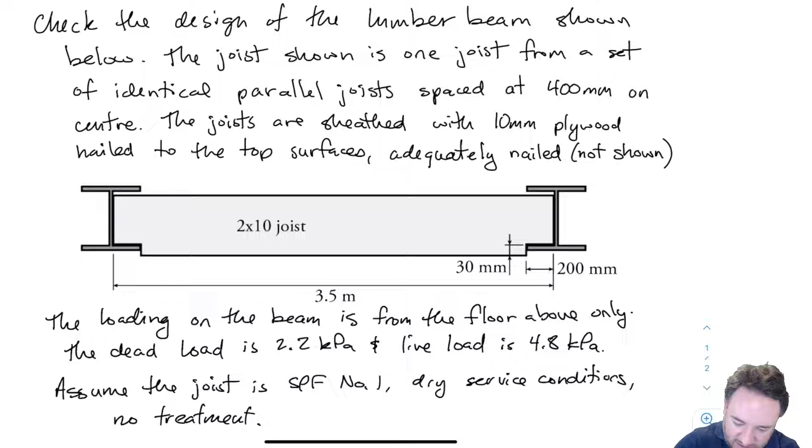So we are going to go ahead and calculate everything. Let's take stock of a few important parameters that we will use throughout. Our beam spacing, as mentioned before, is going to be 400 millimeters.

The span I am going to consider for this is from the center of the bearing over here to the center of the bearing over here. So that's going to be 3.5 minus 100 on either end, so it's 3,500 millimeters minus 200 millimeters. So the span that I'm going to use is 3.3 meters, and that's our L.

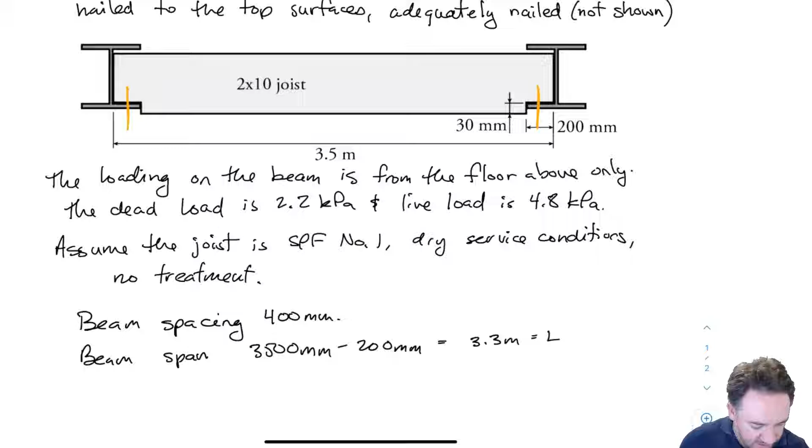We are told that it's dry service conditions, so all our K factors, KSB, KSV, KSF (the one for fracture/shear), KSCP (our compression perpendicular for bearing), KSE (for modulus), are all going to equal 1.0 because we have dry conditions. And there's no treatment, so KT is going to equal 1.0 as well.

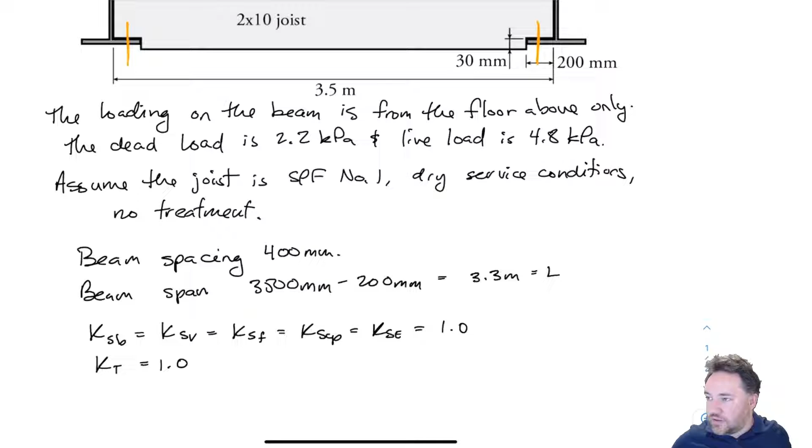Now, what about our system effect factor? You may recall that we have system effect factor conditions, so let's go to the system effect factor table. Here's our system factor table. We have bending, shear, compression parallel to grain. We don't have that in this question, so we don't have to worry about it. And bearing does not have any system effect factor.

So for bending and shear, if I go to the system factor section in the standard, 6.4.4.2 or 6.4.4.1, we can see: does it satisfy case 1? Three or more essentially parallel members spaced not more than 610 apart. Check, they're 400 apart, arranged so that they mutually support the applied load. So case 1 is okay, but maybe we can apply case 2. Let's take a look.

Case 2: the joists, rafters, or studs are sheathed with plywood, wafer board, or OSB, minimum of 9.5 millimeters thickness. That's good, we have 10 millimeter plywood in the question, so that's a check. The second criteria is that sheathing or subfloor is attached to the members to provide minimum stiffness equivalent to that provided by 2-inch common nails at 150 millimeter centers at edges of the sheathing panels. In the question I've said it's adequately nailed, and that's the term used for system factor. So both criteria for case 2 are met.

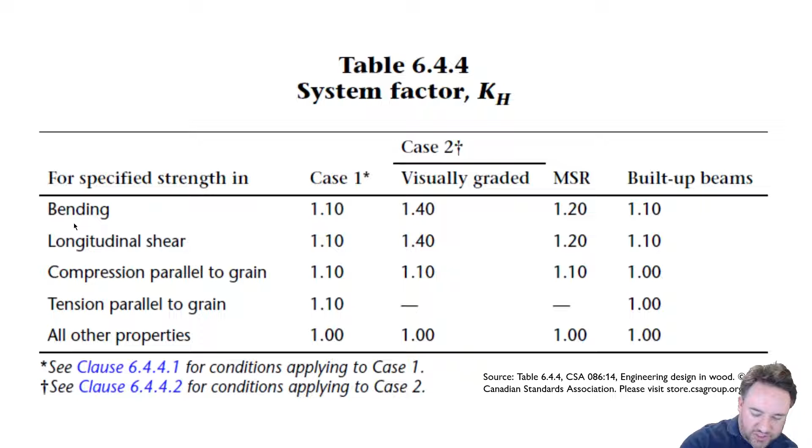So we're going to be able to use the case 2 system factor of 1.4 for our bending and shear calculations. So for KH, for bending and shear, KH is going to equal 1.4. That's great.

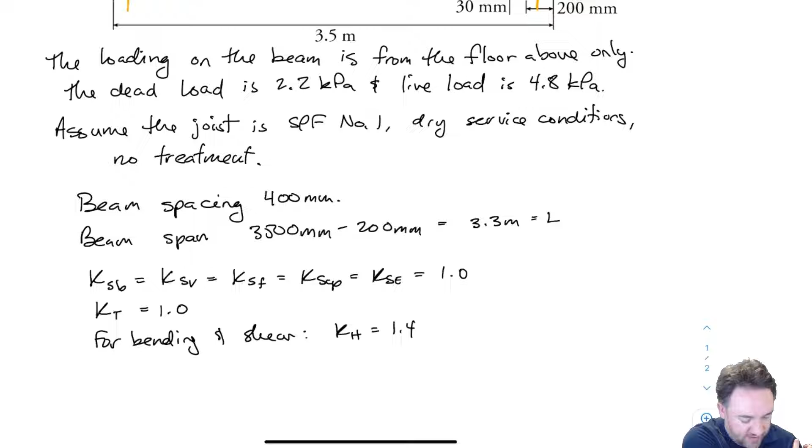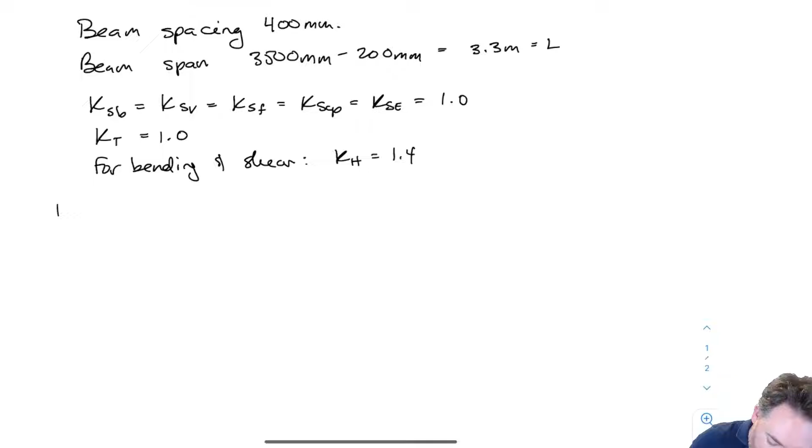Okay, so now let's look at the loading conditions. Actually, why don't we do the beam properties first. We already have some properties here, so let's find all the material properties and list them out.

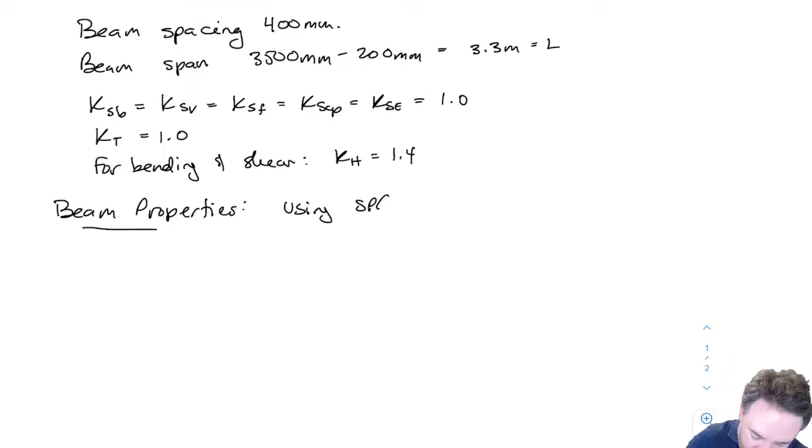We are using SPF #1, and it's a 2x10. If I'm talking about a 2x10, I'm talking about a 38x235. So that's my size, let's put that in. I have B equals 38 millimeters, D equals 235 millimeters, that's my base and height of the cross section. My area gross is going to equal 38 times 235, which is 8930 millimeters squared.

And then what is my S? For bending, we need our section modulus. Since I have this table up already, I can see for a 2x10, my section modulus is 351 times 10 to the 3.

Millimeters cubed. Okay, so then let's find our strengths.

First I have to find my grade category. This is going to be a structural joist and plank category because it's 38 by 235, so it's fallen structural joist and planks, which is table 6.3.1A. We're talking about SPF #1. So my FB is 11.8, my FV for longitudinal shear is 1.5. FC we don't care about because we don't have compression, but FCP, perpendicular to grain compression, we do care about because of bearing, so that's 5.3. And we don't care about tension, but we will care about our E for deflection, and that's it.

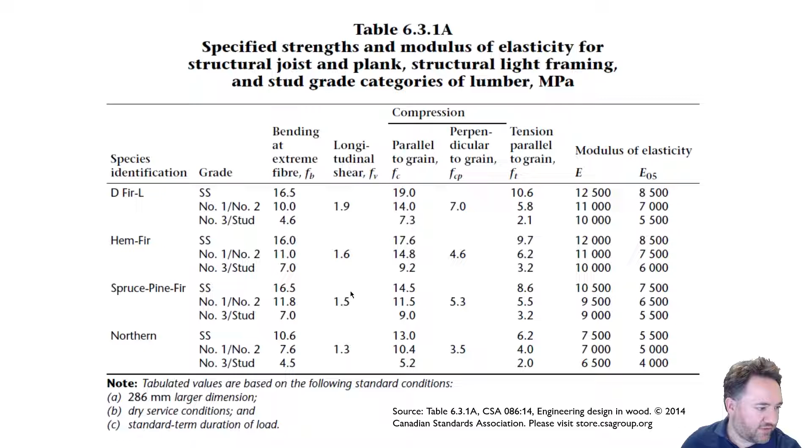So we need E for deflection, FCP for bearing, FV for shear, and FB for bending. Let's put those in here so we have a record. FB equals 11.8 MPa, FV is 1.5 MPa, FCP is 5.3 MPa, and our Young's modulus, which is our mean Young's modulus because we're looking at serviceability for deflection, is 9,500 MPa.

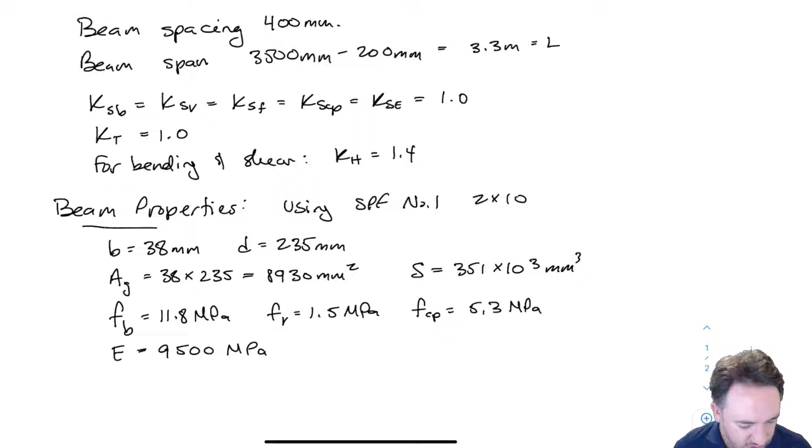Okay, then what about our net area? So our notch depth, say notch DN is going to be right here. It's given as 30 millimeters. That's the depth of our notch.

And our E calculation is going to depend on whether we use the total bearing length or just the minimum bearing length, like the required bearing length. We're going to cover that in a little bit, so I'm going to leave E out for now. But our DN is 30 millimeters.

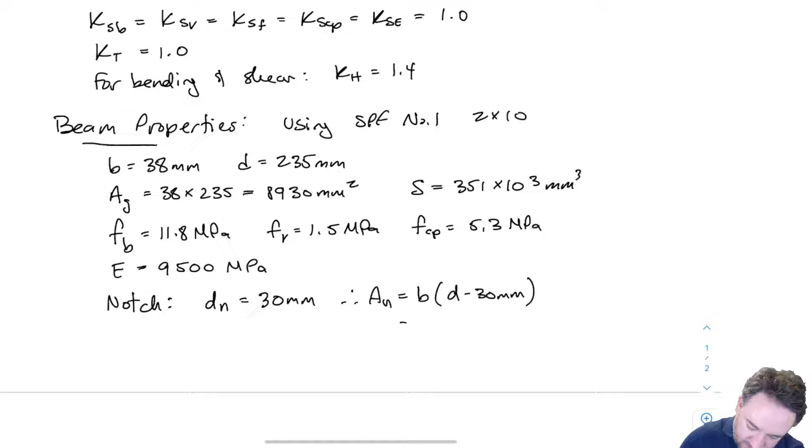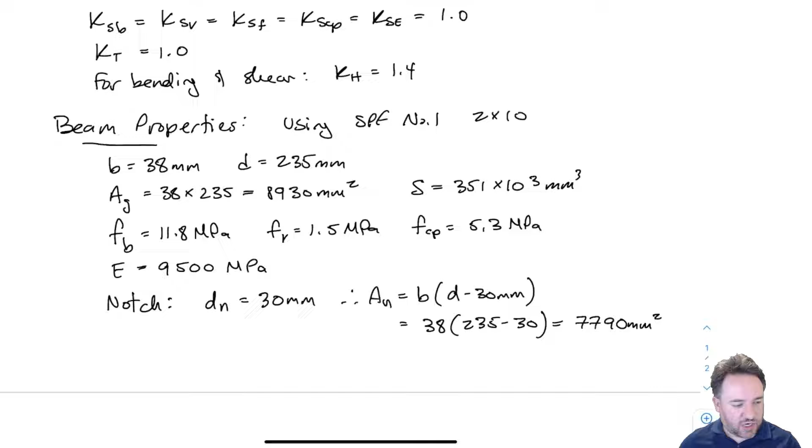Therefore, our AN, our net area, is B times D minus 30, which is 38, 235 minus 30, and we get 7790 millimeters squared. Okay, so now we have our net area, which is the area of the cross section with the notch removed, which we're going to need for our shear.

And then we should also check our net area. Our net area has to be at least 75% of our gross area, and also the notch depth has to be no greater than 25% of the total depth. In this case, those criteria are the same. So if I take my notch depth divided by my total depth, I get 0.13, which is less than 25%. So we're okay in terms of notch - we haven't cut out too much notch. So we're good to go.

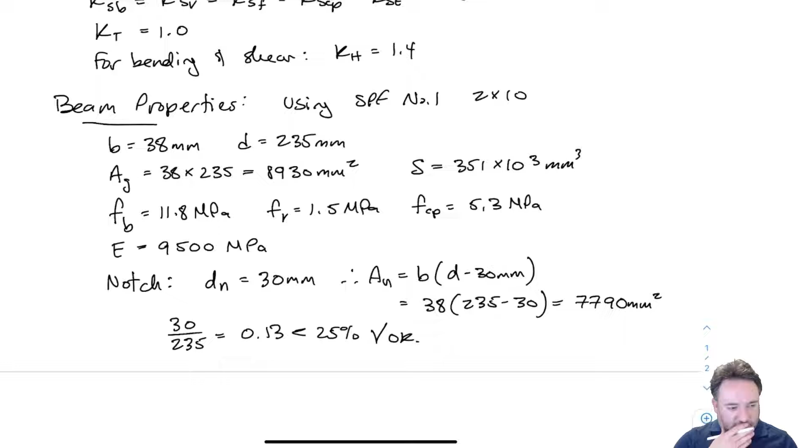Okay, so next, let's calculate our loads, our moments and everything like that. So our loading.

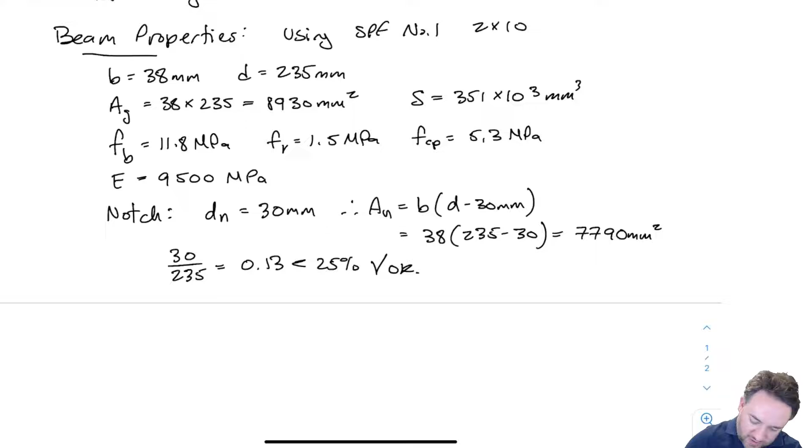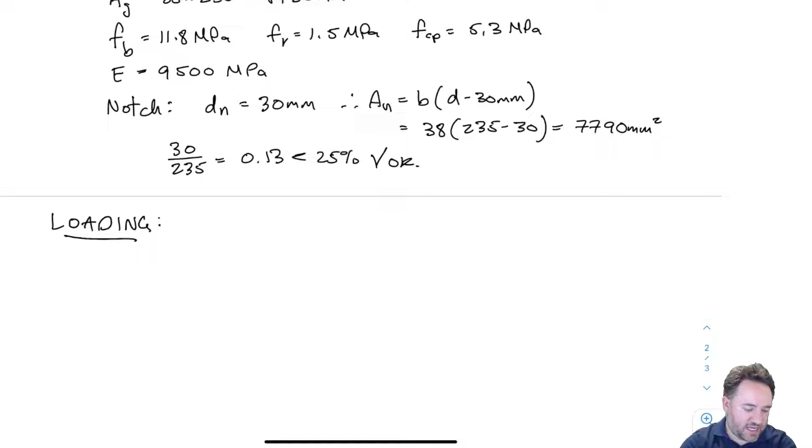All right, so I'm going to look at these load combinations directly. All of our loads are down, so we don't have to consider the 0.9D case. We only have live and dead, so it's going to be clear which load combinations govern. It's going to be either load combination 1, which is 1.4 times dead load, or load combination 2, which is 1.25 dead plus 1.5 live. We don't have any other loads, so there aren't really any companion loads to consider. So this is a pretty easy case in terms of load combinations.

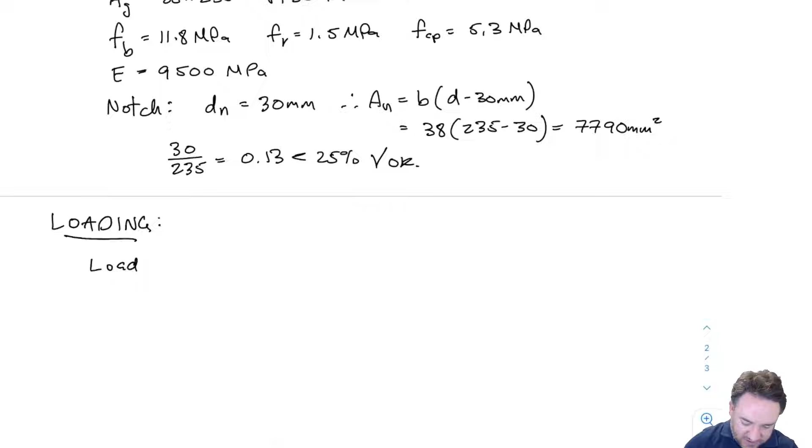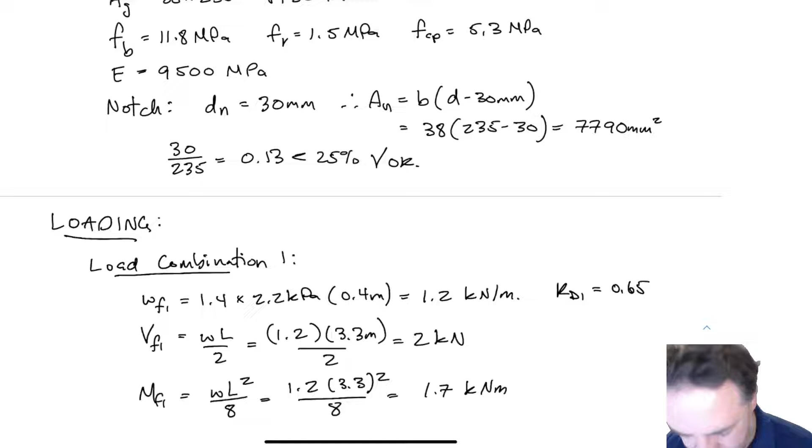So let's start with the first one. Okay, so we'll start with load combination number 1. We've got 1.4 times D, so that's load combination 1. So 1.4 times 2.2 kPa times 0.4, which is the tributary width, the spacing between the joists, and I get a distributed load of 1.2 kilonewtons per meter.

That's the line load. Okay, now I can do this because all of the loads are exactly in the same position. That means I can apply my load combinations in this case directly to the area loads. But I can't always do that if my loads for my different specified loads, like my live and my dead, are in different parts of the beam, for example. But in this case, they're all in the same position, so I'm just going to factor the area load.

And then after that, I can calculate my shear and my moment, which is WL over 2 and WL squared over 8. Surely you know those equations for a simply supported beam with a uniform dead load. And I get 2 kilonewtons for my maximum shear at the end of the beam, and 1.7 kilonewton meters for the maximum moment, which is at the center of my beam.

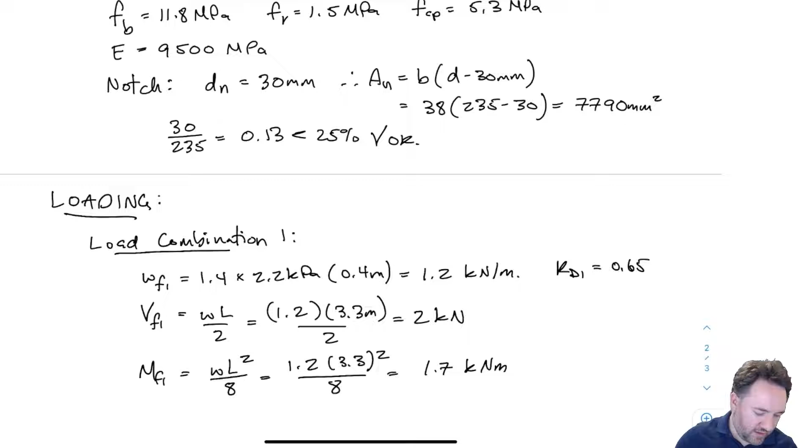And let's do the same thing for load combination 2 now.

Okay, so load combination 2, I now have 1.25 dead plus 1.5 live. I have to multiply that again by the tributary width to get the line load, and I get 4 kilonewtons per meter. Then I can calculate my shear and my moment again. Shear at the end of the beam is 6.6. Moment at the middle of the beam is 5.4.

Okay, so now let's see if we can figure out which of these load combinations is going to govern for shear and for moment. And we're going to look at that in terms of the KD. So I have KD1 and KD2 here.

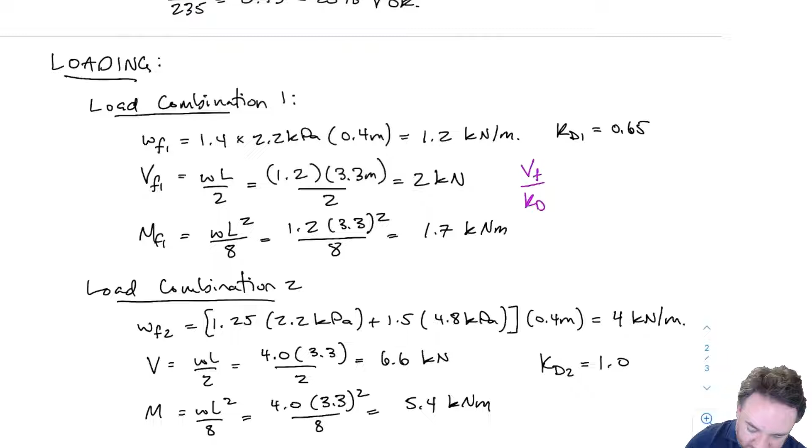What I'm going to do is use that little trick to see if I divide by KD for each of the shear and moment, which one gives me the higher value, load combination 1 or load combination 2. For example, for load combination 1, if I have VF divided by KD, I get 3.1 kilonewtons. And for load combination 2, if I do VF divided by KD, I get 6.6 kilonewtons, because KD is 1 in that case. KD is 1 for the second one because it has live load, and KD is 0.65 for the first one because it only has dead load, as we know.

And if I do the same thing for MF divided by KD, up here I'm going to get 2.6 kilonewton meters, and over here I'm going to get 5.4 kilonewton meters.

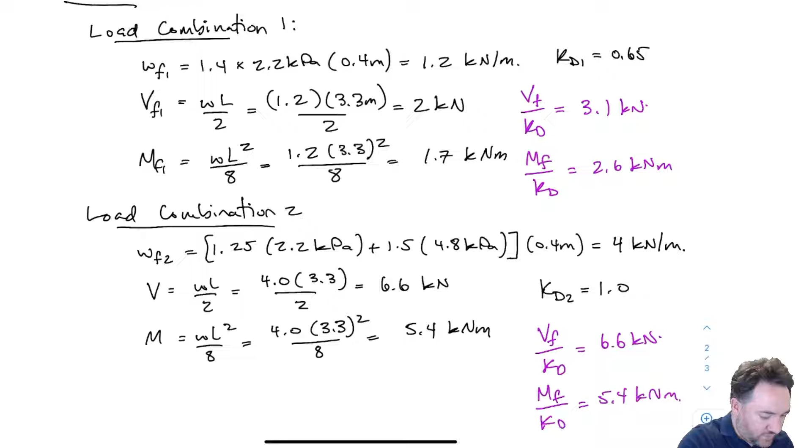Okay, so I'm using that little trick that we learned just to try to figure out which of these load combinations governs, by trying to take out the effect of KD, assuming that the strength, MR and VR, are going to be linearly proportional to KD. So therefore, these ones are going to govern because they are bigger.

Okay, so now that means when I do my strength checks, I'm going to use an MF of 5.4 and a VF of 6.6. And then I am going to use a KD, a duration factor associated with that load combination, which in this case is 1.0.

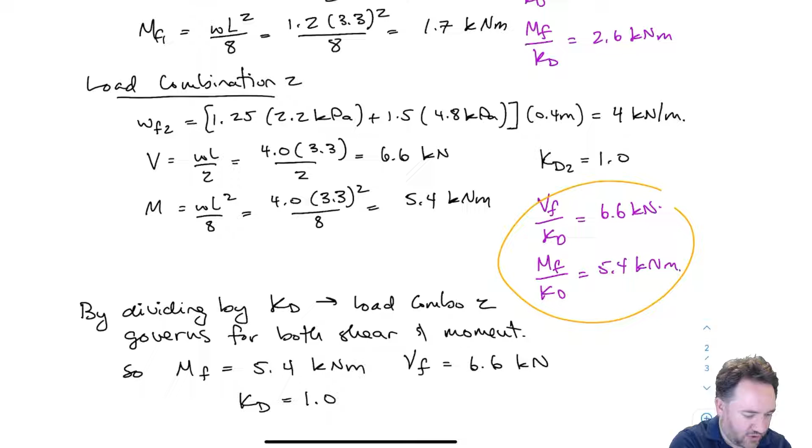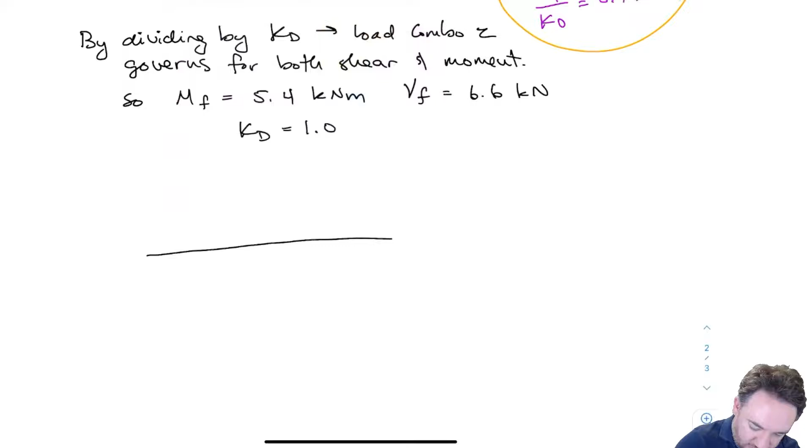Okay, the last thing I want to do ahead of time, while I'm thinking about loads, is to look at what is the VF at D from the support. This will be for when we calculate our shear. So we've seen here that this is the shear diagram. Okay, it's a straight line.

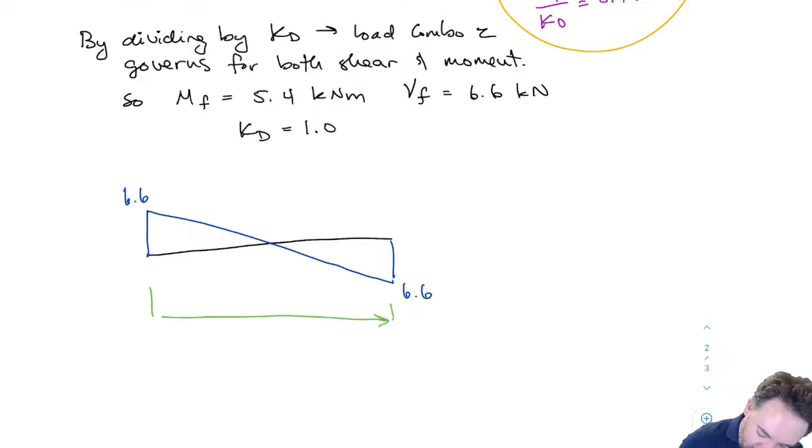This is 6.6, this is 6.6. The total length that we are assuming here is 3.3 meters. So then if I want to go D inwards from the support, I want to look at this case where D is 235, that's the depth of our beam, 235 millimeters. So I want to find basically what is the height here. VF at D equals question mark.

How do I do that? I can use similar triangles. So this length here is 3.3 divided by 2, which is 1.65. And to here, it's going to be that minus 235, so it's going to be 1.65 minus... this is going to be 1.415. A bit hard to see there.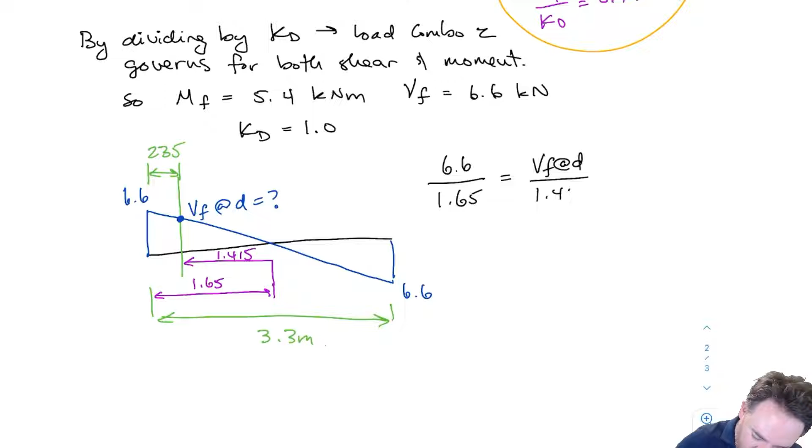So then my heights and my lengths are proportional, right, because I'm talking about similar triangles. So that means that 6.6 over 1.65 is equal to VF at D divided by 1.415. And if I rearrange that, I'm going to find that VF at D equals 5.6 kilonewtons. Okay, so this applies to this particular shear diagram.

If I have a different shear diagram, then I will calculate VF at D, whatever it is, just by looking at the diagram to figure out what the VF should be. Okay, so now this is what I'm going to use for my longitudinal shear resistance check. And it's the same value on the other side because this happens to be symmetric. This is the same VF at D over here.

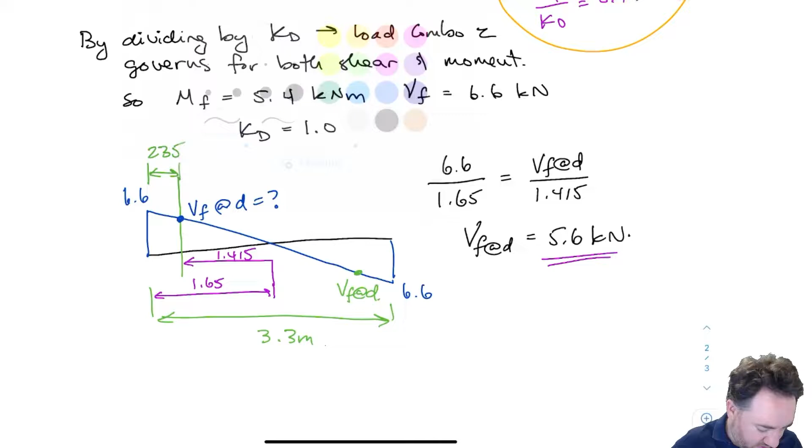Okay, so let us begin then with the actual strength checks. And I am going to start with moment resistance. All right, so for moment resistance, you'll recall we have this equation.

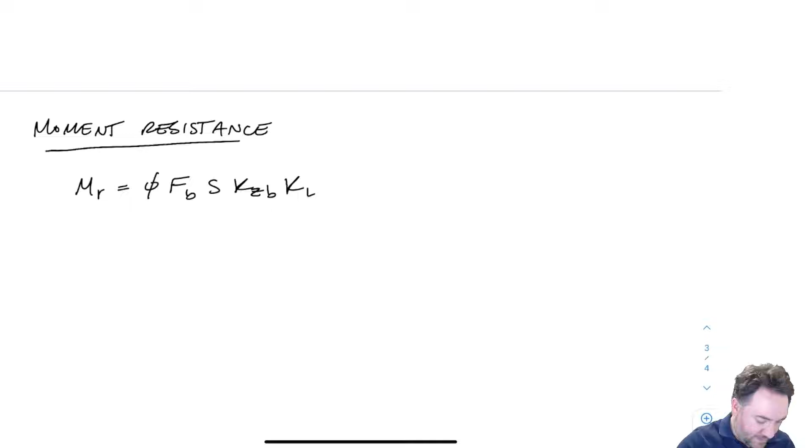So first I need to find my capital FB, which is my modified strength. Small fb was 11.8, kd is 1, ks and kt are 1, and our kh we decided was 1.4 based on a case 2 system factor, and we get that capital FB equals 16.5 MPa.

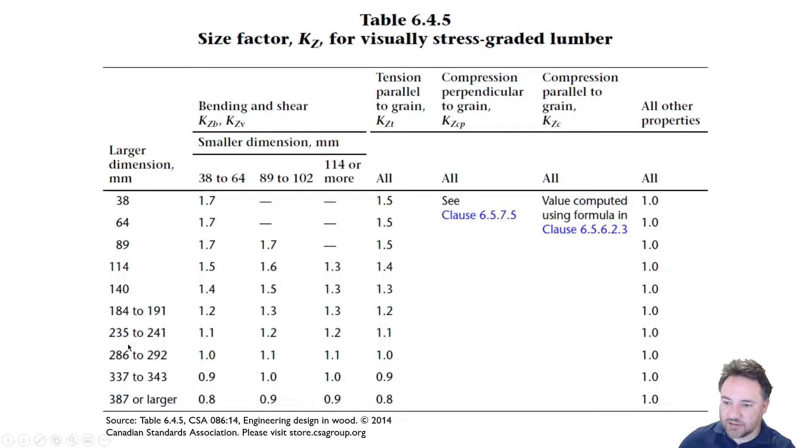Okay, so that's FB. S we already calculated. KZB is our size effect factor. So let us go to the size effect table. Okay, so we have a 38 by 235 beam, and we're looking at KZB here. So for 38 by 235, I have a 1.1. So KZB equals 1.1 from that table 6.4.5.

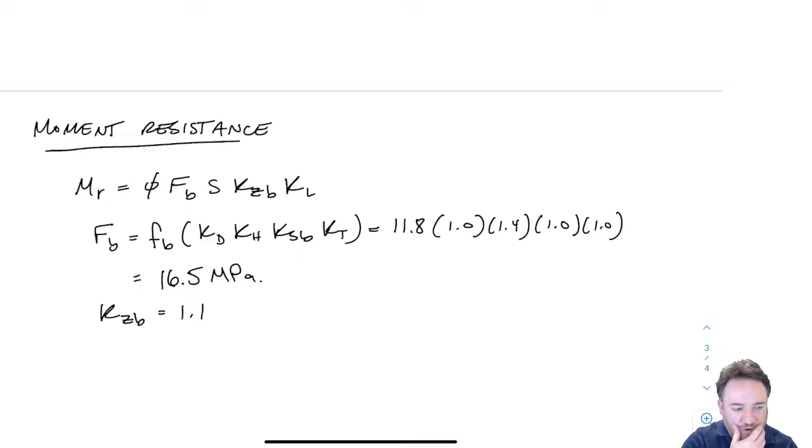And then what about KL? Well, you remember that KL depends on my aspect ratio and depends on my support conditions.

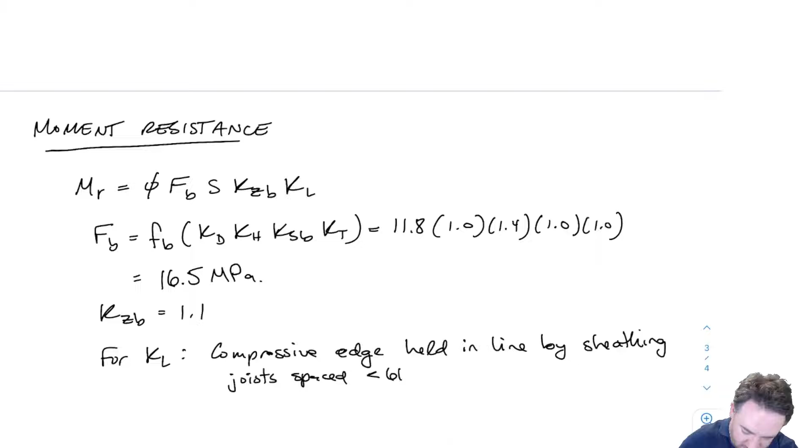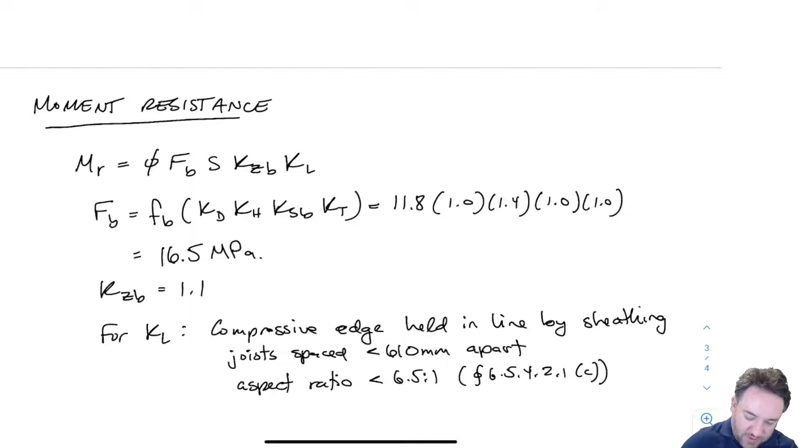Okay, so if we satisfy these conditions - compressive edge held in line by sheathing, the joists are spaced at less than 610, and our aspect ratio is less than 6.5 to 1, which is condition C under the lumber KL provisions - then we can say KL equals 1. So what is our beam aspect ratio? D over B is 235 divided by 38, and that gives us 6.2, so it's less than 6.5. The other conditions are satisfied, therefore KL for this case is going to be 1.0, which is good. It's efficient use of the beam.

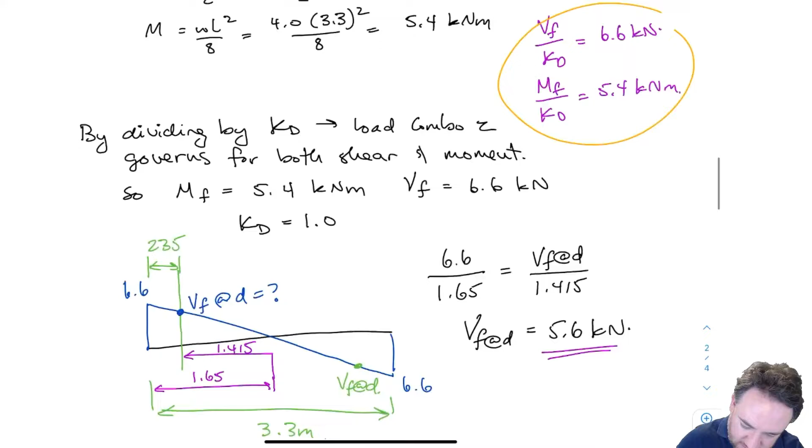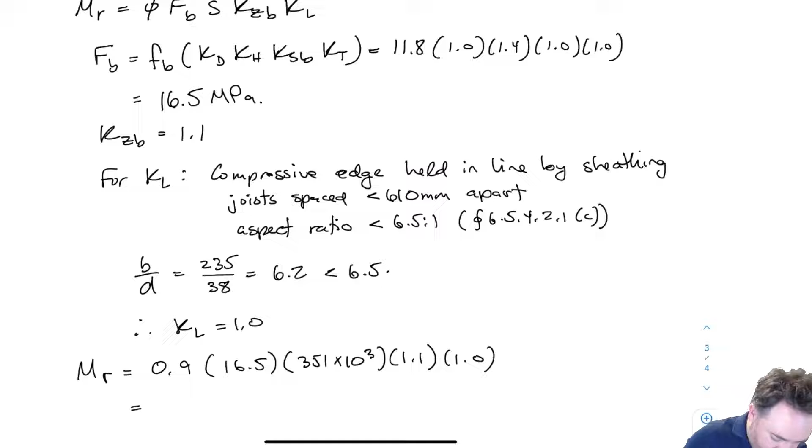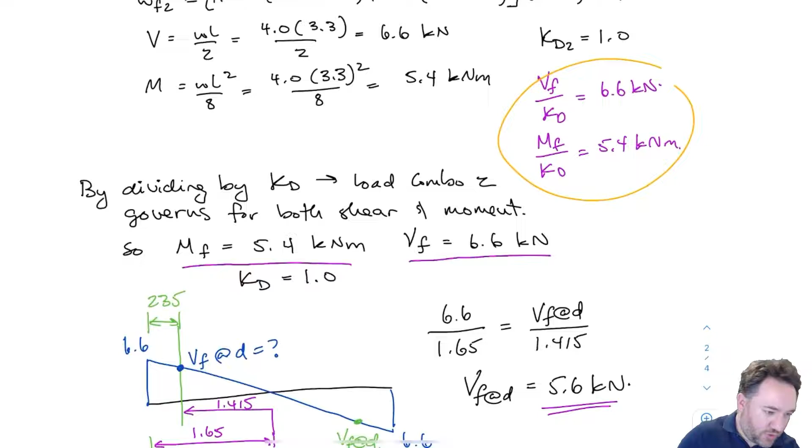Okay, our phi we have, so now we can sub everything in. Phi is 0.9, FB is 16.5, S, as we recall before, was 351 times 10 to the 3, KZB is 1.1 and KL is 1.0, and we get an MR of 5.7 kilonewton meters. And what was our applied MF? If we go back to our loading here, we see that our MF was 5.4 kilonewton meters. So it's just less - this is a very efficient design. So this is greater than MF, which equaled 5.4 kilonewton meters. So our resistance is greater than our factored moment, therefore beam is okay for moment.

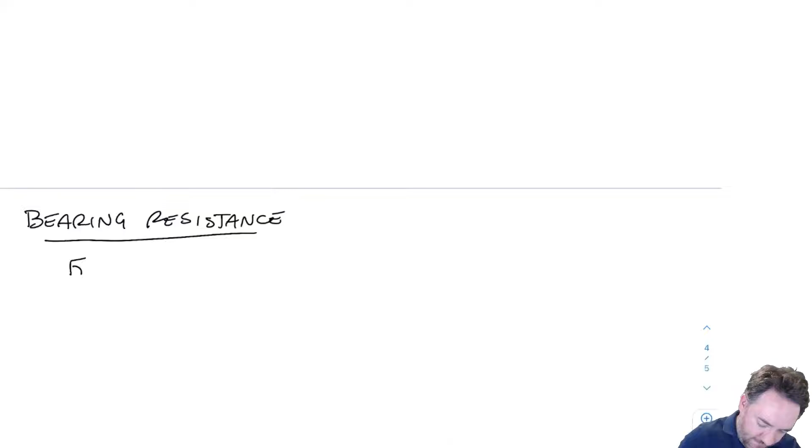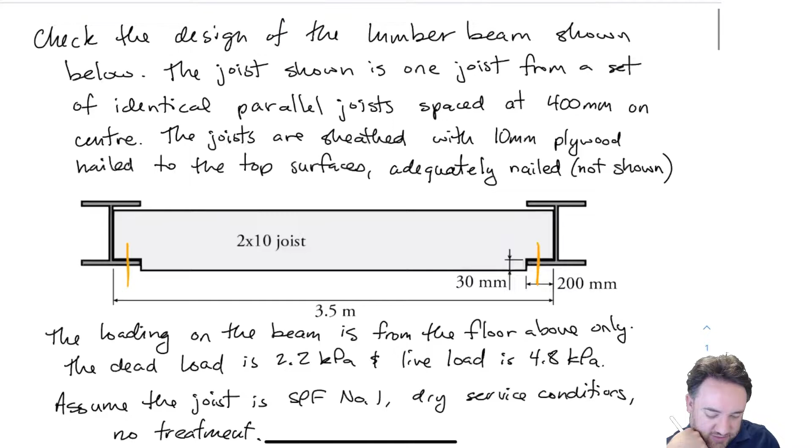Okay, next we're going to check bearing resistance. So there's a couple approaches we can take to this. I know what my bearing length is in the design because it's given in my geometry. So my bearing length here is 200 millimeters, that's the width of the beam sitting on the flange. So I can check what is the strength QR associated with that 200 millimeter bearing times the 38 millimeter bearing width, which is the width of the beam, and find a QR and compare that to my QF.

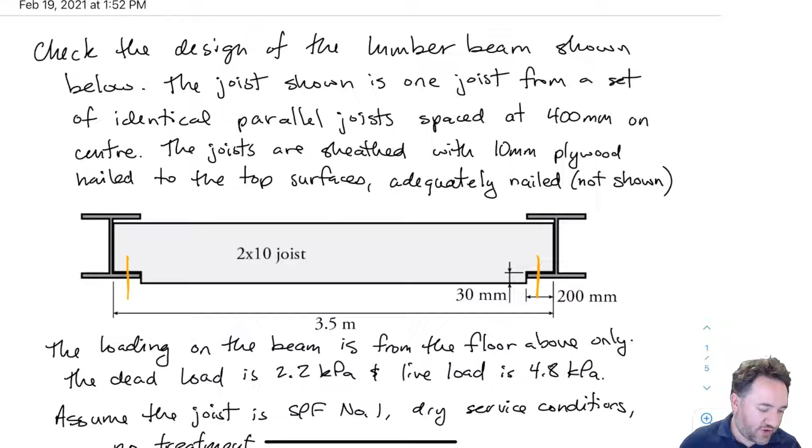But also for later, since I want to do a detailed shear check for the notch shear, that includes consideration of reducing the bearing length to the required bearing length instead of the actual bearing length, then I'm going to try to find actually what's my minimum bearing length right now. And of course, if my actual bearing length happens to be greater than my minimum bearing length, then I'm fine.

Okay, there's also two things that I have to check here. I have to check effect of all applied loads at the bearing surface, and I also have to check the loads applied near a support because there is some distributed load that is going to be within D of the support location, and I'm going to check that as well.

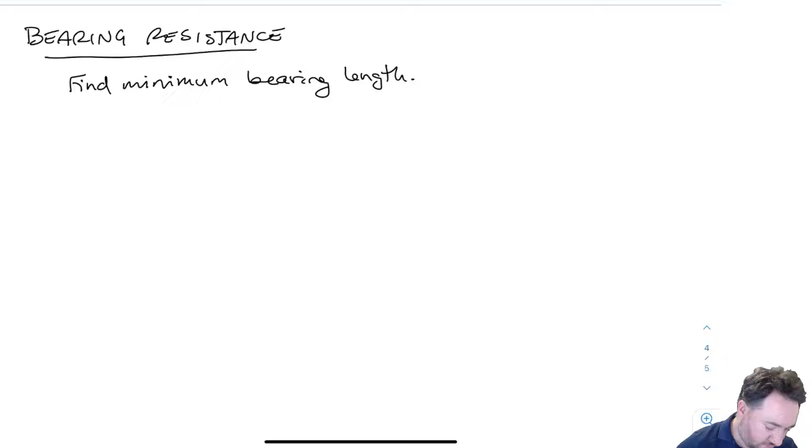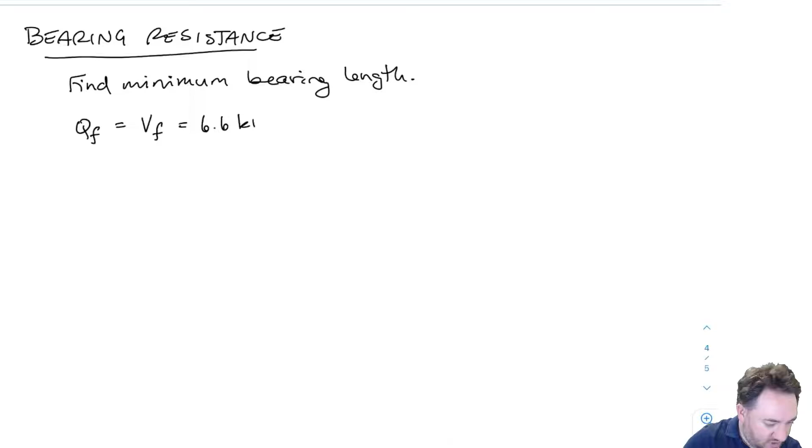Okay, so what's my QF? My QF here is equal to VF at the support, which is 6.6 kilonewtons, which we already determined. Okay, so this is my reaction force. And I'm going to need, and you're going to recall, that QR is equal to phi - this is for effect of all applied loads - FCP, AB, KB the bearing, KZCP. Okay, so I need to find all these things.

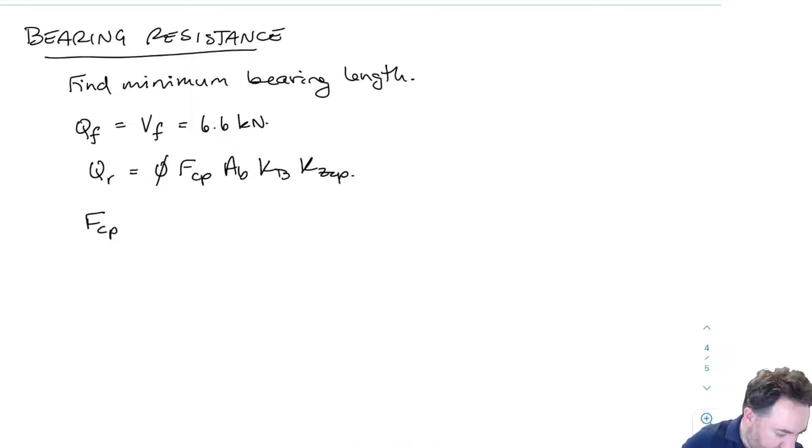So what's my FCP? Well, there's no system factor for bearing because bearing is fundamentally a local phenomenon. I can't have multiple members resist the bearing for one member, that fundamentally doesn't make sense. So I just have KD, KS, KT, they're all one. So my capital FCP is just small FCP, which is 5.3.

What's my bearing factor, length of bearing factor? It's going to be 1.0. I mean, if I don't know the bearing length, if I'm doing a design, I don't know the bearing length, then I should probably just assume 1.0 to start. But of course, in this case, we are within presumably 75 millimeters of the end. I mean this is a conservative assumption because we might not necessarily be within 75 millimeters of the end if we're only considering the inner portion.

And then KZCP is going to equal also 1.0 because the member cross-section is vertical. Remember that KZCP is intended to compensate for when we're loading on the flat. Vertical, B over D is less than 1.0. Okay, so we have all those things.

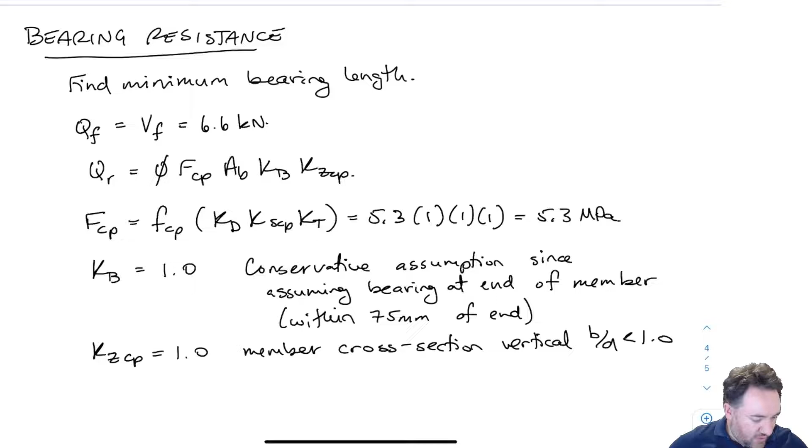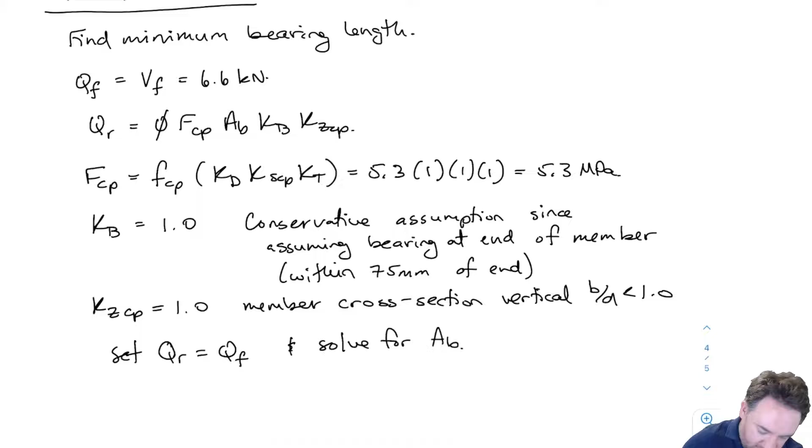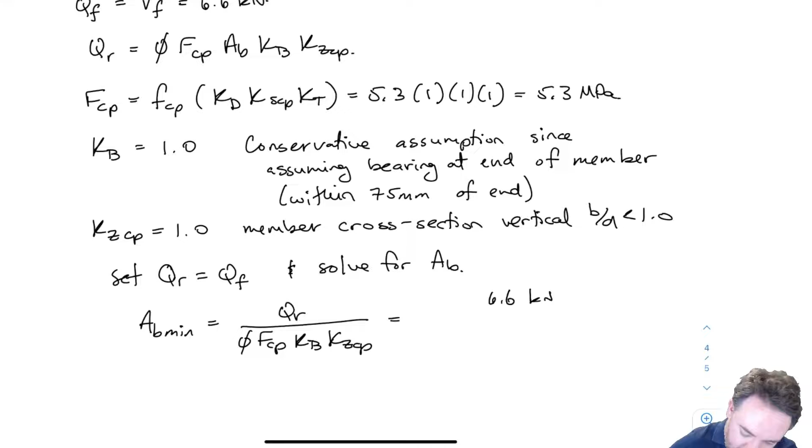So what I'm going to do is set QR to equal QF and solve for area of bearing that we need, AB. So if I rearrange that equation, I'm going to get AB min equals QR divided by phi FCP KB KZCP. So I'm going to get 6.6 kilonewtons divided by 0.8, our phi for bearing, 5.3 is our FCP, 1.0 and 1.0. Being careful that 5.3 is in MPa, so I should consider 6.6 in newtons if I want my answer out in millimeters squared. So this gives me 1549 millimeters squared, the minimum amount of bearing that I need.

Okay, so I calculate that if I did 6600 divided by 0.8 divided by 5.3, then I'll get 1549.

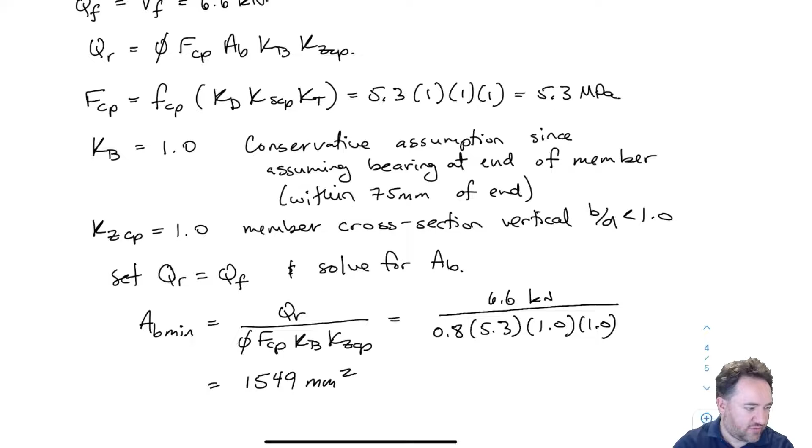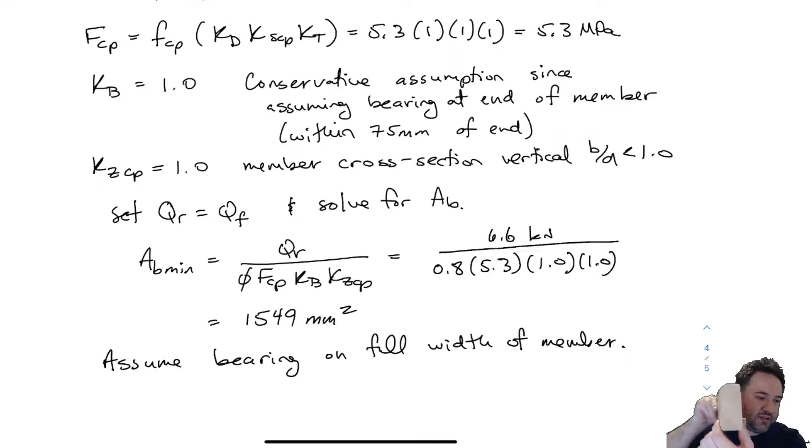Okay, so then if I assume bearing on full width of the member, which makes sense because the beam is sitting on a flange. So the full width of this member is going to be sitting on this flange. So I think this is a very good assumption. This is basically what we're given.

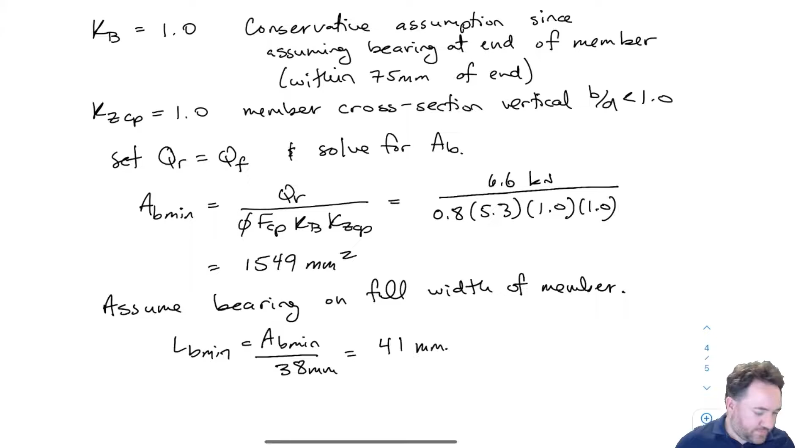So then my LB min, my minimum bearing length along the length of the member, is going to be AB min divided by the width, which is 38 millimeters, and I get 40.8 millimeters. Actually, let's just call that 41 millimeters. Okay, so I have 200 millimeters, but I only need 41.

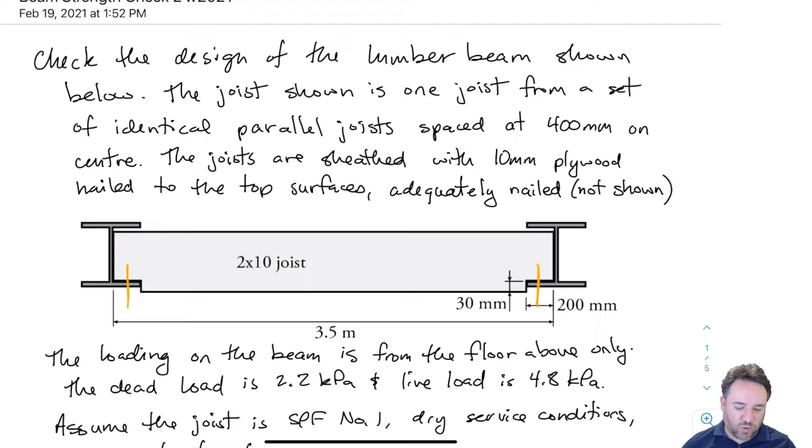So when I go to calculate my shear strength for the notch shear, I can take advantage of the fact that I have a smaller required bearing length than my actual bearing length, and calculate my E based on the center of that required bearing length instead, as I discussed in the shear video.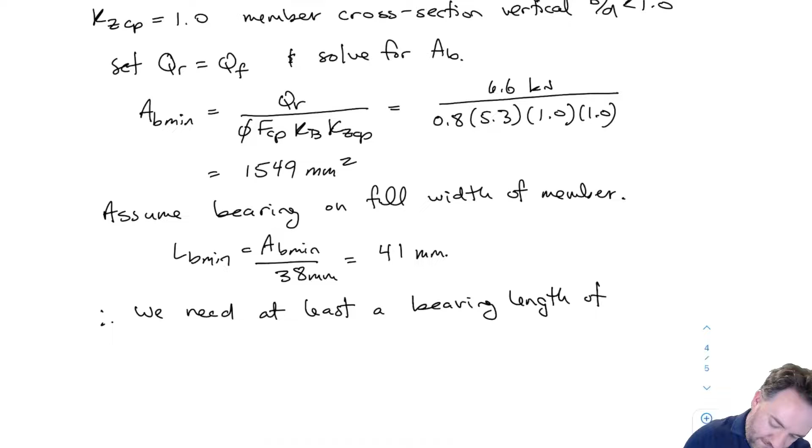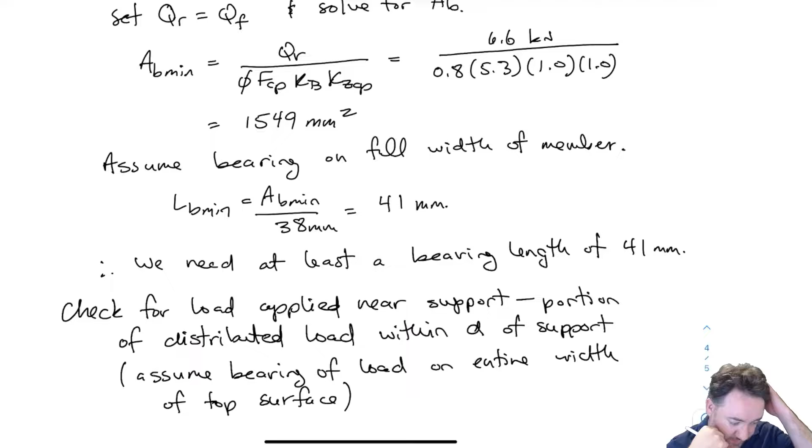Okay, so now we're going to do the check of load applied near a support. So far what we've done above is the check for all applied loads at the support. So now we're looking at loads in this area and within D of the support. So if my support is like this and this is D, I'm looking for all of these loads to either side of the center that are within D of the support. So this part of the distributed load would not be included.

I have a bearing surface up on top, that's my top bearing surface. And on the bottom, I have this bearing surface down here. So that's going to give me my average bearing area between the two of those. And then I'm going to be able to calculate QR prime, which is the effective loads applied near support. So let's go ahead and do that.

Okay, so here's the length. So we have a certain length within D of the support. We have on the right side 235, which is D, and on the other side we have 100, which is basically the part that is just to the left here. So we have 100 on this side, and 235 on this side, and between the two we have 335.

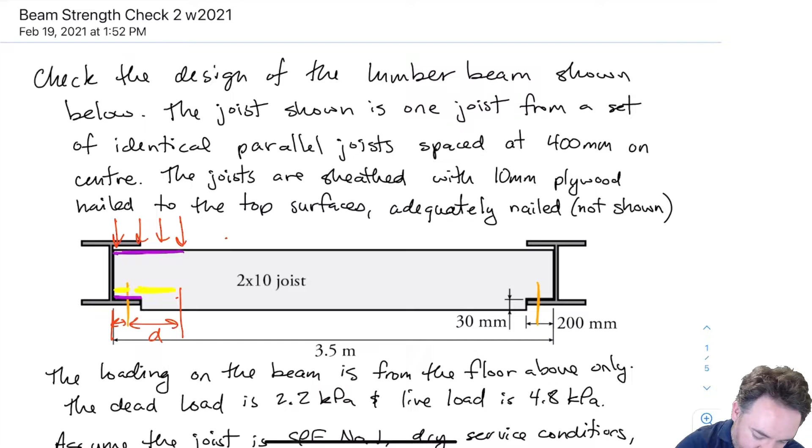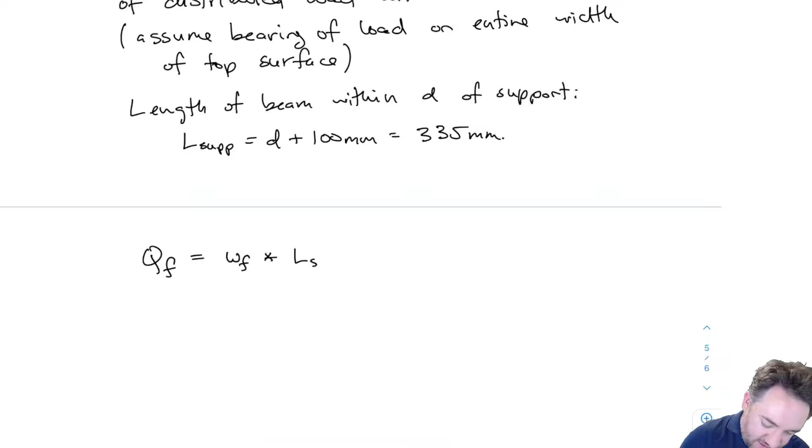Okay, so what is my QF for this? It's going to be my WF times the L support. So it's only the portion of the load that goes directly from top to bottom. It's not the full reaction, it's only that load on the top that's within D of the support. We went over this in a lot of detail when we talked about bearing.

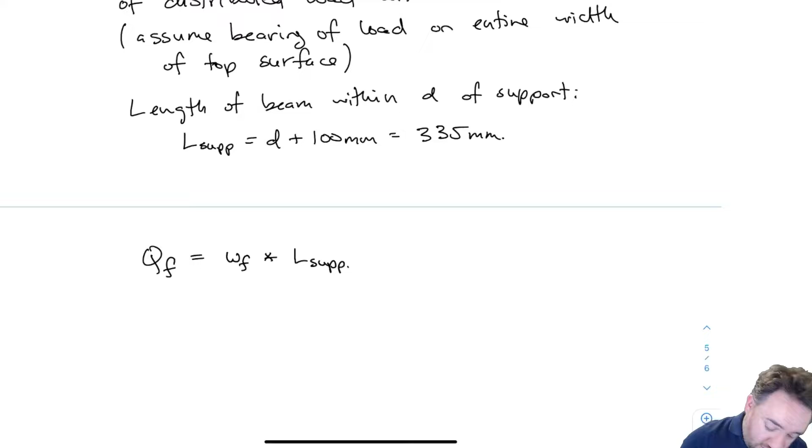So the WF here is my factored load, which was 4.0 kilonewtons per meter. That's the load on the top of the beam for load combination number 2, and this is 335 millimeters. So if I multiply those together and fix the units, I'm going to get 1.3 kilonewtons. Obviously I have to put 0.335 meters into my calculator to get 1.3 kilonewtons.

Okay, so that's the number that I have to compare to my QR prime. So let's assume the minimum length. We're going to assume that we're using the minimum length on the bottom and the actual length on the top. So let's calculate AB prime.

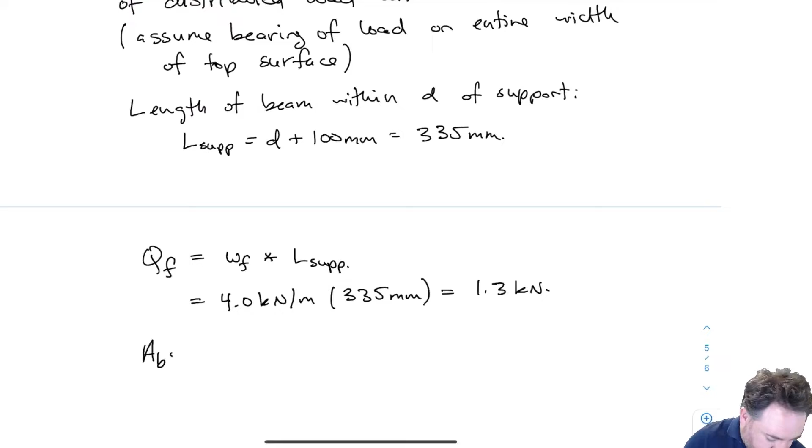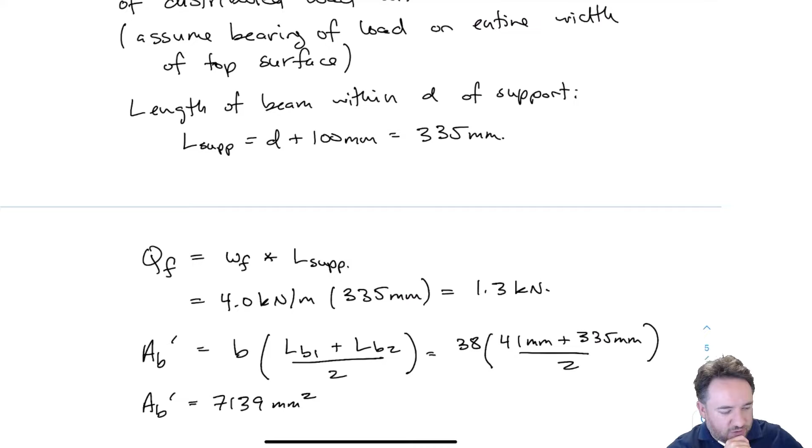You recall, okay, so I took a conservative assumption, which was I used the required bearing length on the bottom of 41 instead of the actual bearing length, which is 200. And on the top, I used 335, which is the actual length of the area within D of the support on either side.

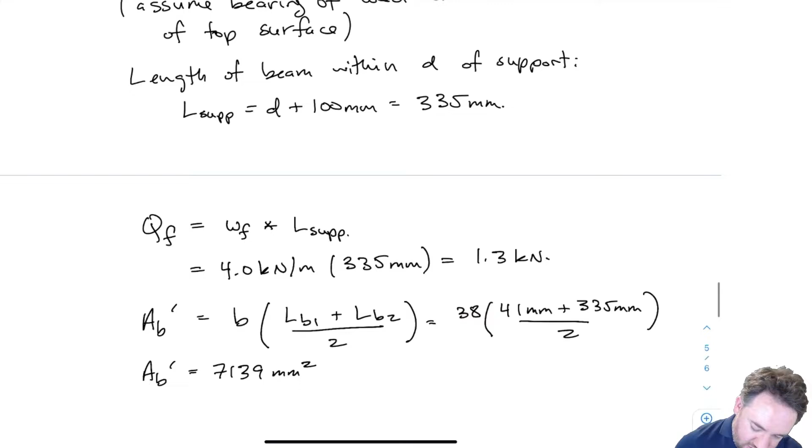And so I have to check here that this is less than 1.5 times B times LB1, which equals 1.5 times 38 by 41, which equals 2323. Sorry, I've run out of room here. So therefore, I have to make my A prime B equal to this 2323 millimeters squared. Okay, so this is a very conservative assumption.

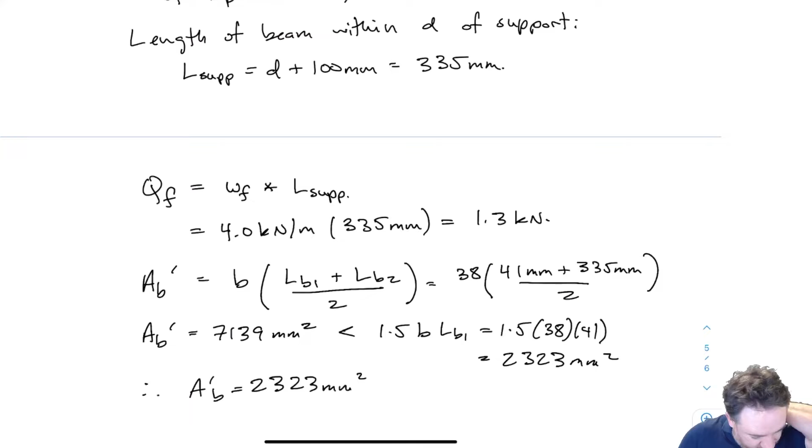So if I can satisfy this, then I'm going to be more than fine. Okay, so QR prime, the equation looks like this: 2/3 times phi FCP AB prime KB KZCP. My phi is 0.8, my FCP is 5.3, my AB prime is 2323 times 1 times 1. And I get 6.6 kilonewtons, which is greater than my QF, which is 1.3 kilonewtons. So we are A-okay for bearing.

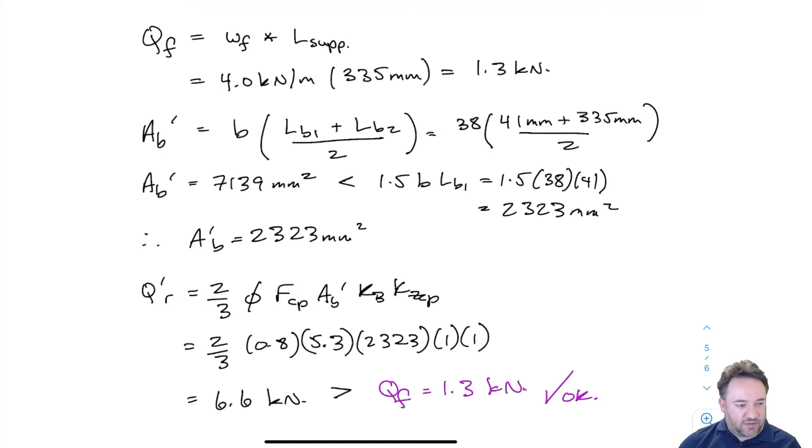And this one happens to be way greater than what's needed, so I think the effect of all applied loads is going to govern here. All applied loads was also a factor of about 4, so perhaps similar. Okay, so that means that bearing resistance is fine. I think that I'm going to make a cut in the video here so that we can cover shear resistance and the deflection resistance in a follow-on video.